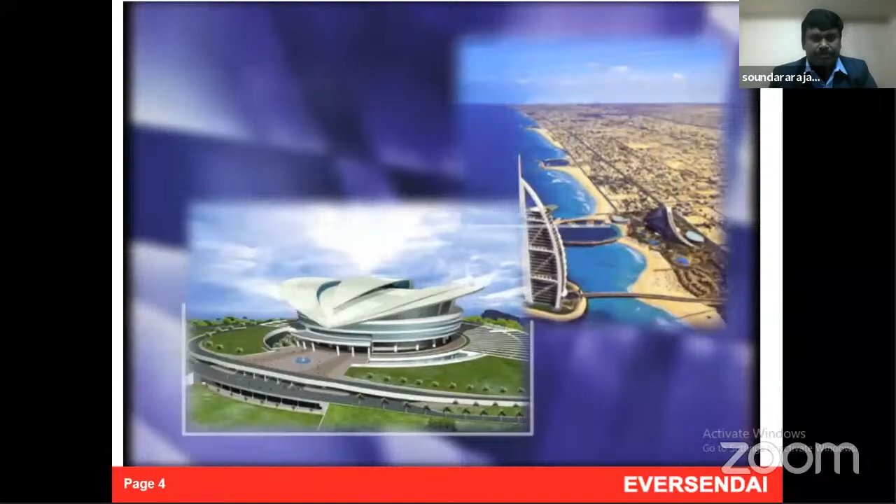Normally we belong to tall towers. That is our core strength. So we undertake integrated structural steel works, composite structures, mechanical installation works, and offshore processing units.

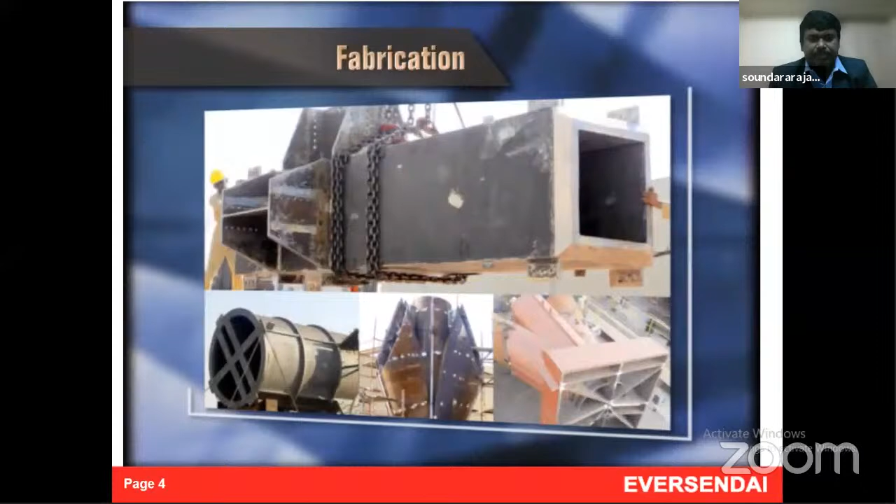So these are some of our fabrication photographs. These are the projects which we have done in Malaysia: Petronas Tower and the Sky Bridge, which is connecting the left and right tower, Putrajaya Convention Center and the KL Tower, Telecom Building. This is KL Airport, KL Central Station, the metro.

These are the power plants which we have done in Malaysia, and we are the first to do a 1000 megawatt power plant.

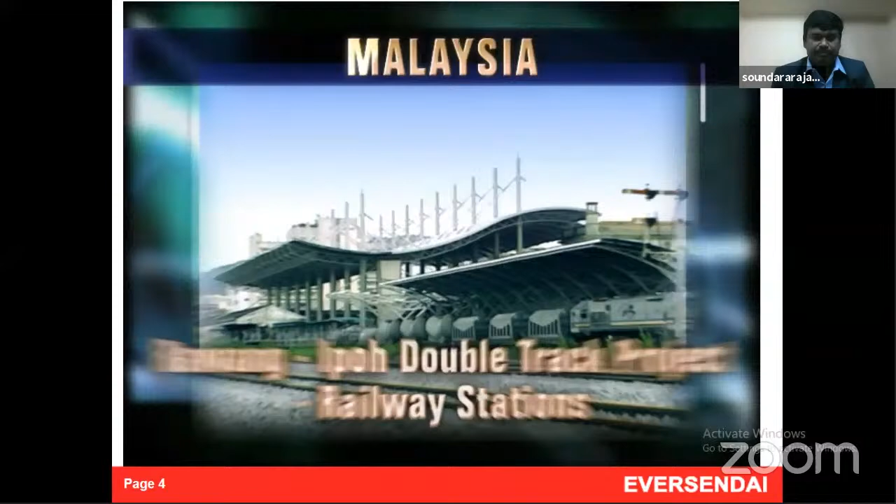And these are the projects in Singapore. The Republic Plaza, currently the tallest Singapore building. Tuas checkpoint, which is connecting Malaysia and Singapore. This is Changi Airport, the current Singapore airport.

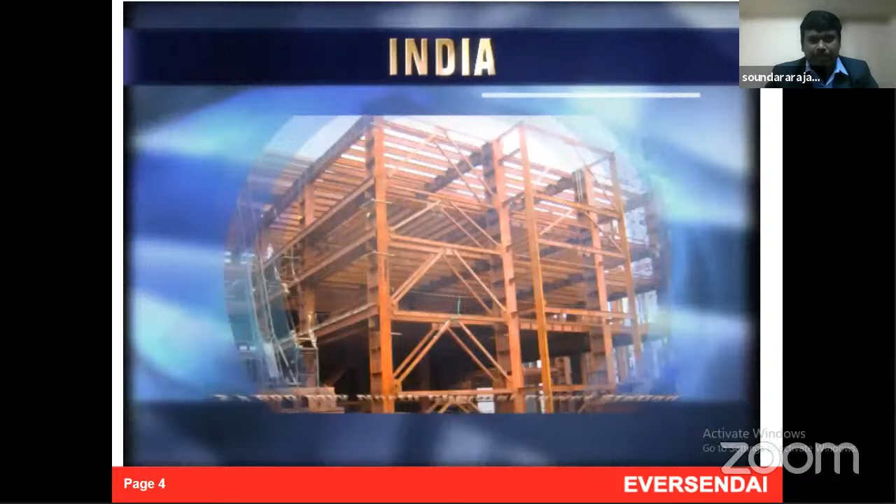Thailand, Philippines, Hong Kong Airport. And these are the projects in India: Mumbai Airport, North Chennai Power Plant, Yamco Power Plant, Marathon Tower in Mumbai, Worli Tower, which is an 85-story building of Oberoi.

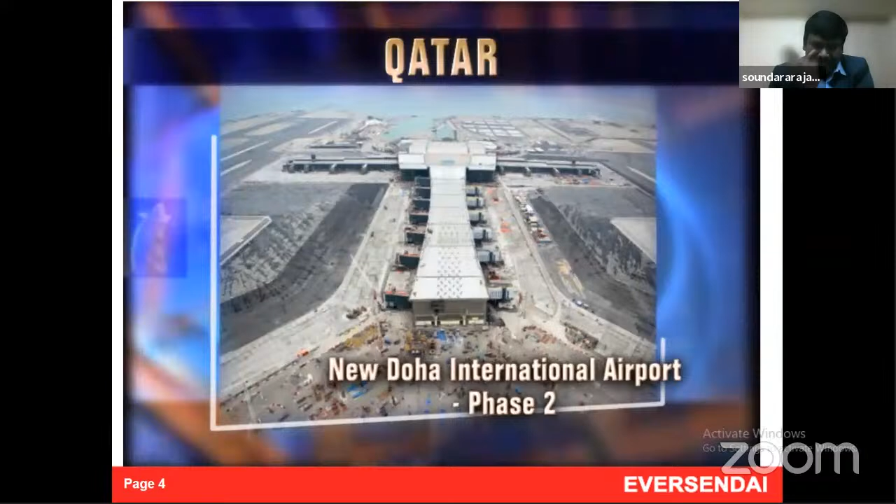This is in Saudi. These are the projects in Qatar. This is the Qatar International Airport, New Doha International Airport. This is another crazy project, the Qatar International Museum.

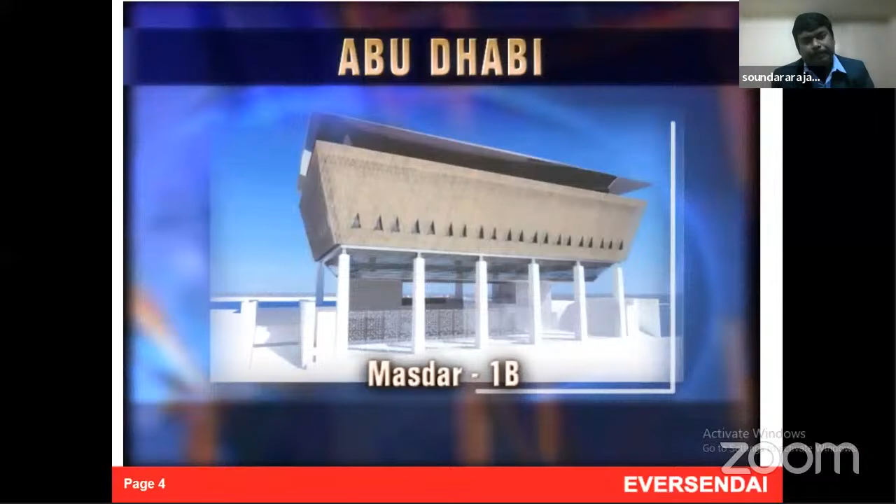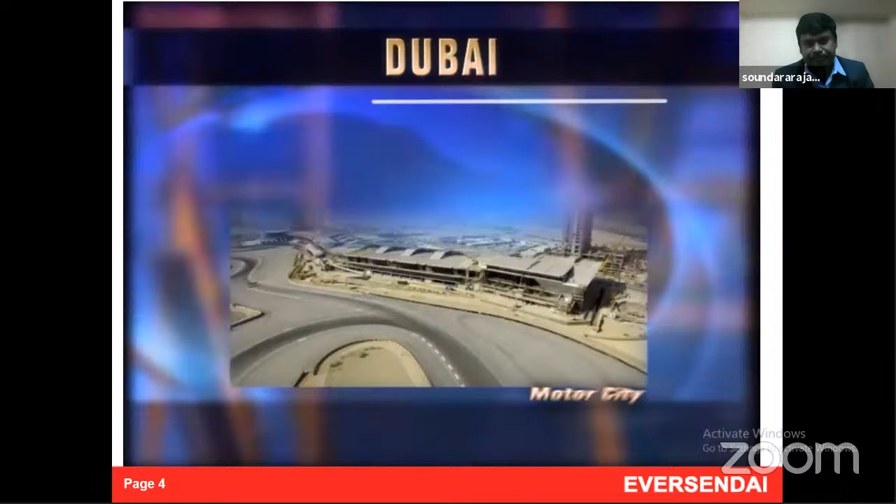So with 35 years of experience, we are currently stepping into the next frontiers. Today what we are going to do is majorly divided into two chapters.

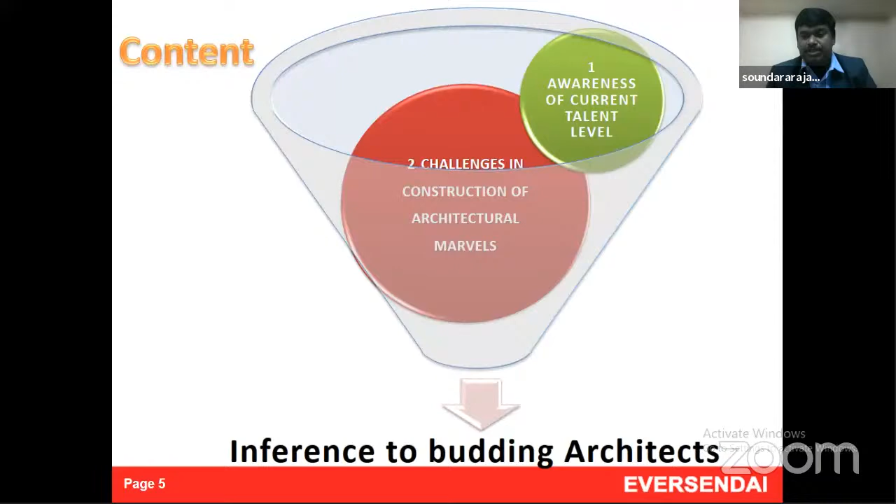Since we are here with the student community, I want to create some awareness of what an architect currently is and what we as students are aware of, and then we will get into the challenges. Normally, what is the role of the architects?

Architects create, improve, and protect the environment in which we live. So this is the major role of an architect. We plan, design, oversee the construction, and take care of the maintenance of the building. Everything we do as infrastructure - houses, towers, dams - everything is part of architecture.

But how far are we doing this? Whether it is 5 years before, or say 125 years before - 125 years, we have the metallic era, we have the Eiffel Tower and the Statue of Liberty. So all these things we have built before 125 years. Is this 125 years the one where we have done the architectural marvels?

No, we go further beyond, we go further to 150 years where there are marble structures which we have created. The world-famous Taj Mahal, which we built 150 years before, as a world marble wonder. We collected marble stone from Rajasthan, Tibet, Afghanistan. Even the dome - if you can see the dome, the main dome is about 55 meters, and the height is about 35 meters.

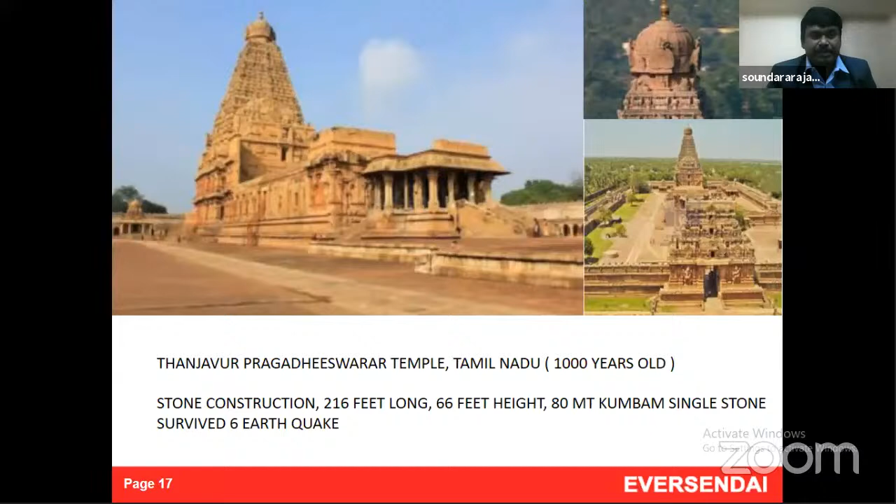The wooden bridge in China is about 1,000 years old and still stands. Further, we go beyond to about 2,000 years when we see the Grand Anicut in Tamil Nadu, which was built about 2,000 years before, and the marvel still stands.

We go further beyond 2,300 years, the Great Wall of China. We would have seen Game of Thrones, where there are huge high walls of 700 feet or 700 meters long. Similarly, before 2,300 years itself, a wall has been built between countries to protect the country from invaders.

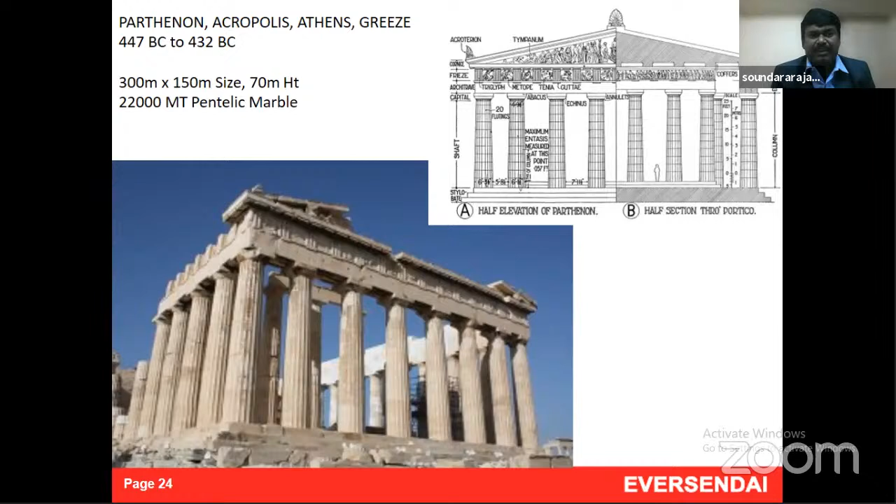2,500 years we passed upon. We can see from Greece marble stone marvels of about a height of 70 meters. They have built these in marble.

Further 4,500 years, we go into pyramids, where every block is 2 meter by 2 meter. It is the best construction, where it withstands all the natural calamities and it is still undisturbed.

5,000 years. We have the Stonehenge in England. All the prehistoric monuments are there. It is a culture of 5,000 plus years. We as engineers, we as architects, have been living and giving wonderful monuments to the world.

Despite all these things, normally your professors or even your parents will talk about those days being the golden days. Even if you graduate and cross another 20, 25 years, you will say no, the era when I lived, or the era of my grandparents, is the best.

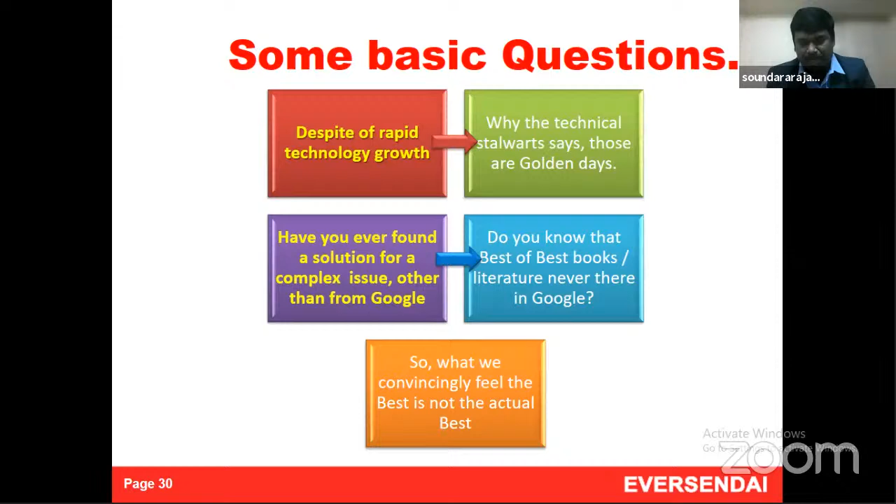Since nowadays we mostly don't put pen to paper and draw on the drawing board, we normally get into Google and some softwares where our productivity and our thinking capability get reduced.

Now we will get into the challenges. The architectural marvel has been created and sketched out. What are the difficulties in bringing this marvel into a practical aspect? I divide this into 3 phases: one is detailed design challenges — as an engineer we have to do detailed design where there are challenges; the next is fabrication, where there are difficulties; and then there are difficulties in erection.

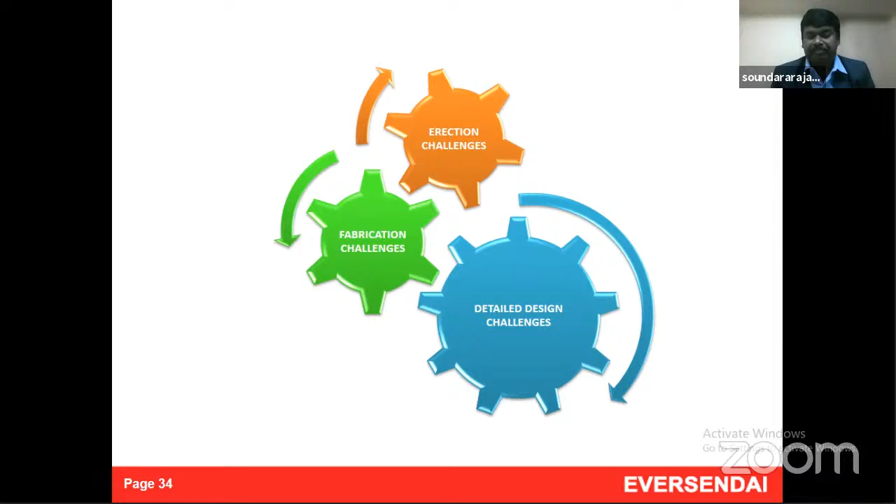First we will see the detailed engineering difficulties. So if you can see the difference between the skeleton and the finished structure.

First is the geometry and setting out. Normally, when we set out the geometry, it is never orthogonal. Whenever we want to build some marvels, it will never be orthogonal. Take anything — even when Ram Kumar talks about the first structure, he mentions the Statue of Unity. There is no symmetry at all — the nose is different, the ear is different, his dhoti is different, everything is different.

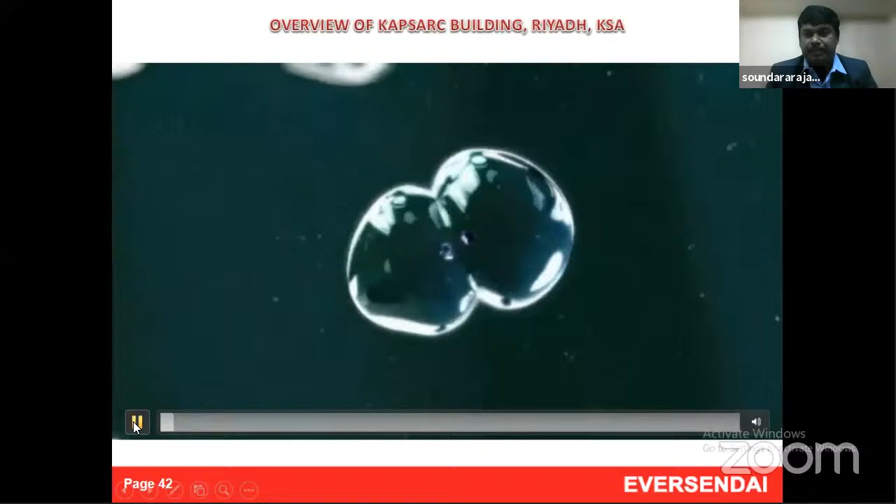Now we come into the geometry. We will take an example of KAPSARC — it is in Saudi Arabia, a mosque, and this is the architectural intent. I will run through a small video of how the architect developed the structure, by means of droplets of rain put together. This is basically a mosque.

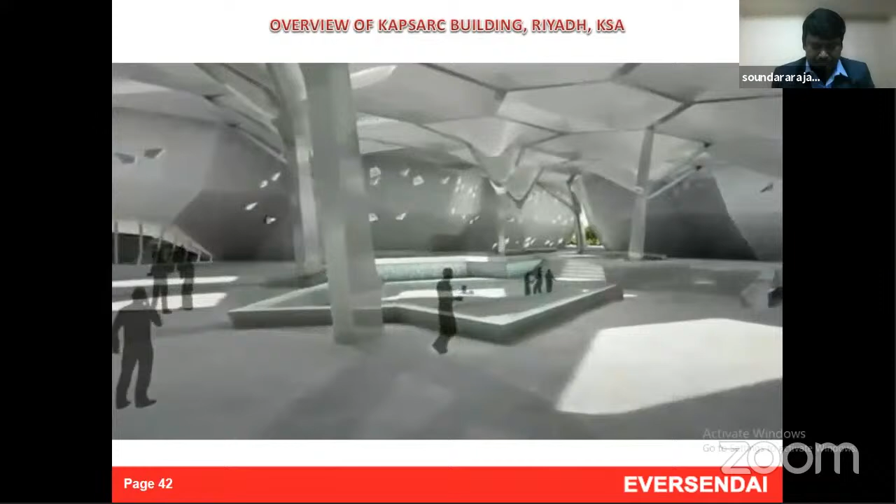It has different types of columns and nothing is symmetrical. It has natural light coming in.

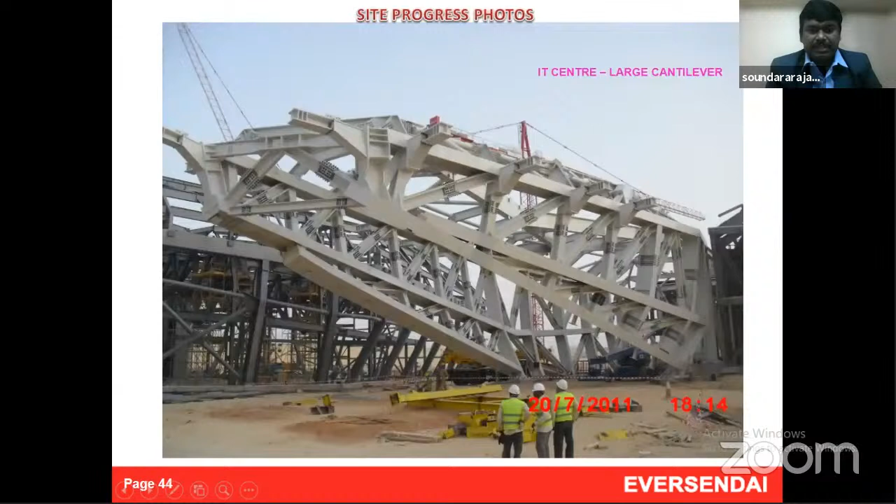This is the stage during construction where you can see the skeleton. This is a cantilever — about 15 meters cantilever. So the geometry plays a big, different role.

The geometry has to be derived from the major architectural model — that is where building information modeling comes into picture. There should not be any differences between the architect's thought and the real-time construction. And the nodes — normally this is what I want to emphasize.

There should be a vision about when we blow up some joints — during construction there can be a bolted joint or a welded joint. So what type of joint is required, which member has to go first, whether structurally the intent has been perfect or not — these multi-planar joints play a very big role, along with the connecting of these multi-planar joints.

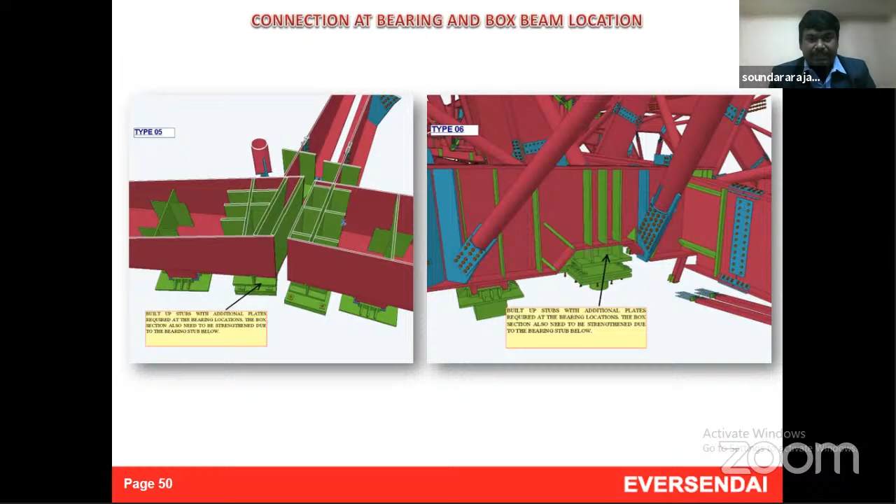This particular structure is supported by means of bearings, and the bearing supports are highly critical. These are some connections where the members are different — you can see the supported I-section member is of a different size to the connecting supported member. So the connection is highly complex.

I will just put an example of another dome structure.

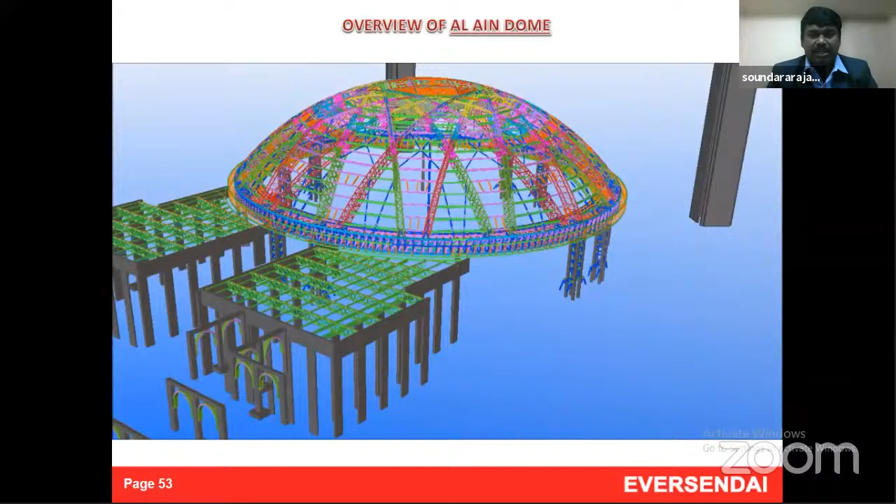The difficulty in constructing a dome is that normally a structure is intended to deflect. There is a difference between the deflection during construction and deflection during the purpose of use. When the structure is being deflected during construction, I have to give a pre-camber. Pre-camber is nothing but inverting my deflection.

Say, for example, my structure is deflecting by about 50 mm. From my theoretical point, it is deflecting 50 mm. So during the construction process, we will construct it with an upper camber of 50 mm, so that once it deflects, it will come to the normal position. That is called pre-cambering.

So when we do pre-cambering, the problem is, in a dome-like structure, the dome will have proper diameter and proper surface dimensions. But this pre-cambering is done only on the trusses, running on the peripheries and at the centers. These trusses alone will be lifted up, so the pre-cambered structure will be highly complex to arrive at.

So this is a similar structure where there are supports and the pre-cambering has been effected. At every node, the pre-camber will be defined, and only then will the geometry be arrived at. This geometry and the original geometry will have a difference.

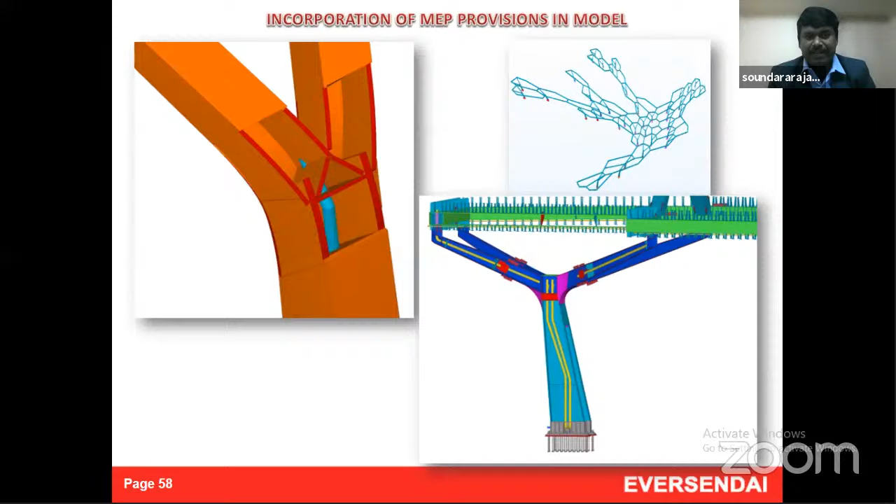The next challenge is the other vendors. Apart from the structures, we have MEP pipelines running through, and rainwater pipelines. All these things have to be coordinated. So there is a small video of how the MEP provisions have been incorporated. This is a 3D model. During the 3D modeling phase itself, all these plates and pipes will be modeled, and the required openings will be provided.

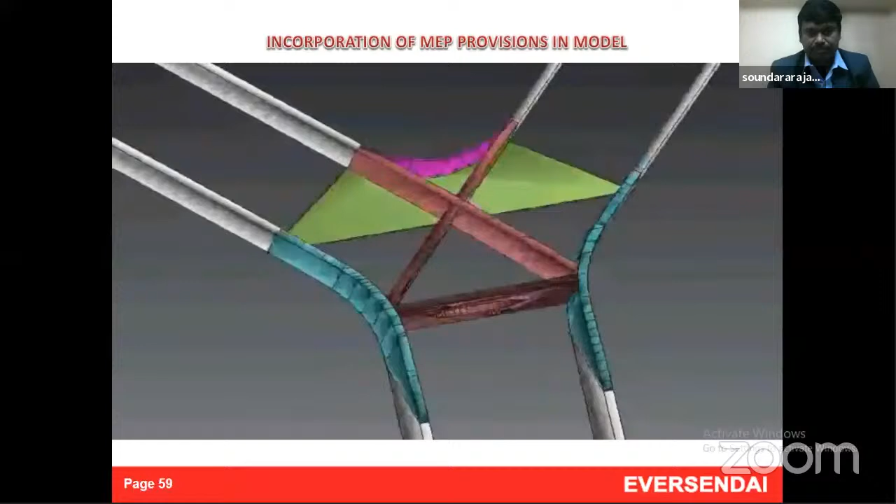So unless we do building information modeling, we cannot do it properly.

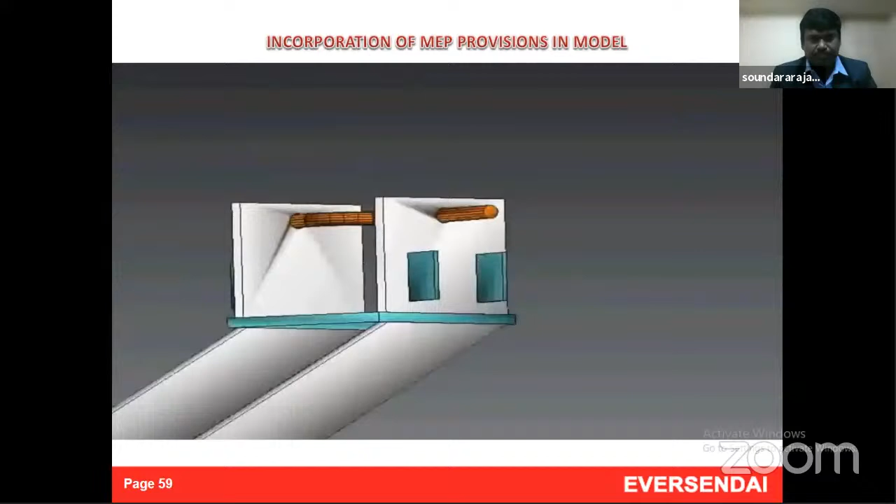So other disciplines like inserting plates inside the core walls - you can see these are shear walls. Normally, a shear wall is a structural element provided in multi-story buildings, especially to control the drift. Normally the structure will deflect H over 500 or H over 400. That means if a structure is about 50 meters, so 50,000 divided by 500, the structure can deflect up to about 100 mm. So this deflection control mechanism is done by providing shear walls in between the structure.

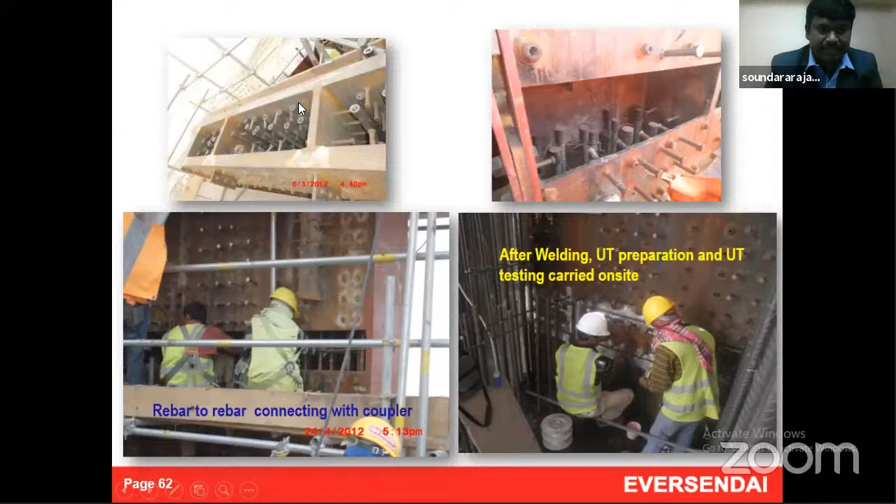So these things also have to be coordinated. You can see the shear walls and the rebars - highly congested. All this has to be coordinated during the design phase itself. And also the facade.

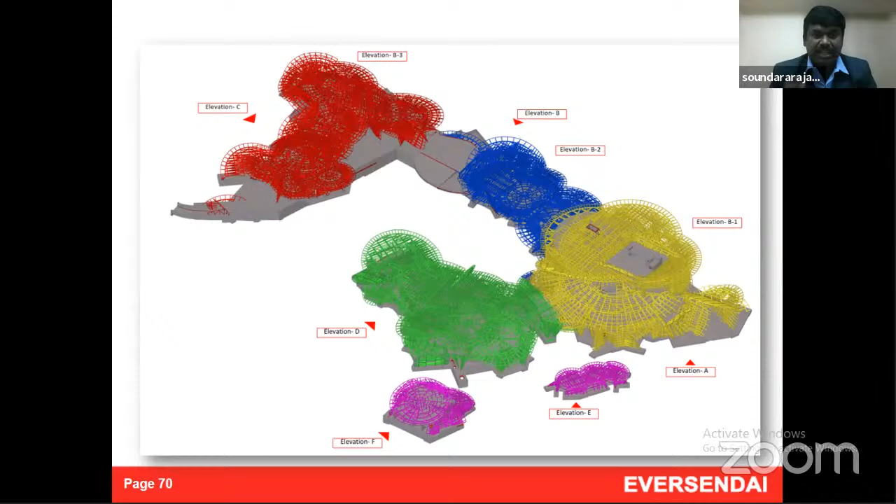And during the fabrication time, as we see in the design phase, there are multi-member nodes. This is another crazy structure which we love. This is one project where it had been awarded to another contractor who could not build it, and even the Qatar Queen herself was the project manager overlooking all this construction. This is the Qatar National Museum, and it is a very crazy structure.

The architectural intent for this particular structure comes from the desert rose. If you see in the desert, this is the type of rose which will be available.

Based on that, that particular structure has been arrived at, and it is one of the highly complex structures which in my lifetime I have seen.

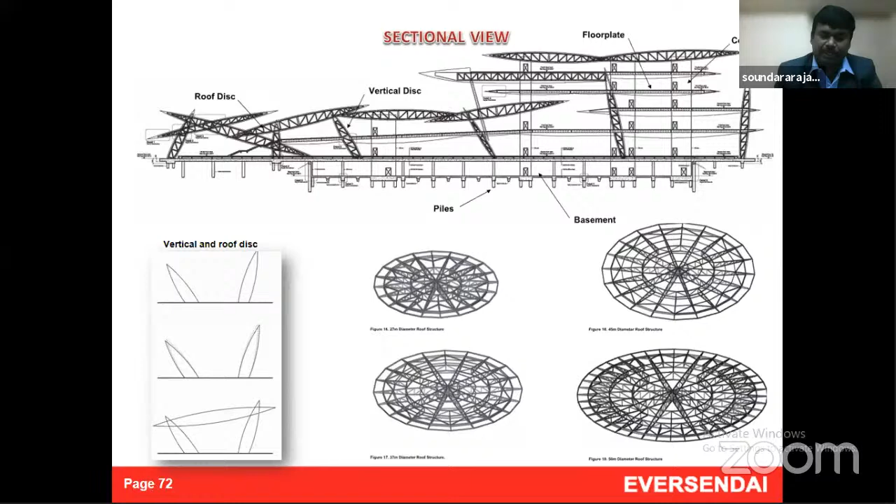You can see the concept. There are vertical discs, you can take the left bottom, and over the vertical disc there will be a top roof disc connected. And this will be of every inclination. This is from real-time desert rose, it has been arrived at. And these are the joints.

At one particular node, about 64 joints were there. 64 members have been connected in one particular node. So you can see the highly complex multiplanar nodes.

And the next challenge in term is achieving the curvilinear geometry. When you take any curvilinear structure, some structure we can curve by means of roundo machines and we can round it off. But sometimes the multi-dimensional, multi-angular members we have to do in segments. You can see at the top where small segments have been welded together. And this is that particular portion of Abu Dhabi roof.

And this is another crazy structure, this is the YAS canopy, where this is again a challenge in terms of bending and curving the members. And it is again a hollow structure.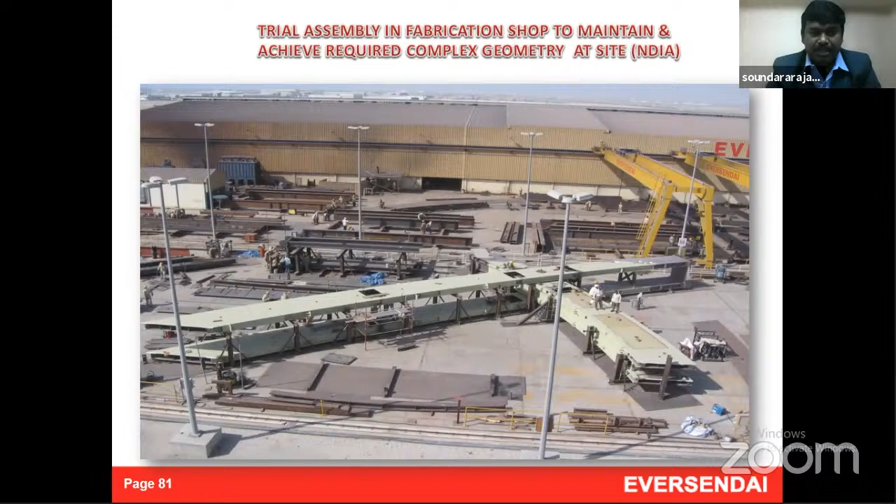This is for Qatar airport. So this is again for Qatar airport. You can see this is the curved roof, the main terminal roof structure. And this again for the Qatar National Museum. This is in the factory itself. Everything will be verified, the fittings, everything will be verified.

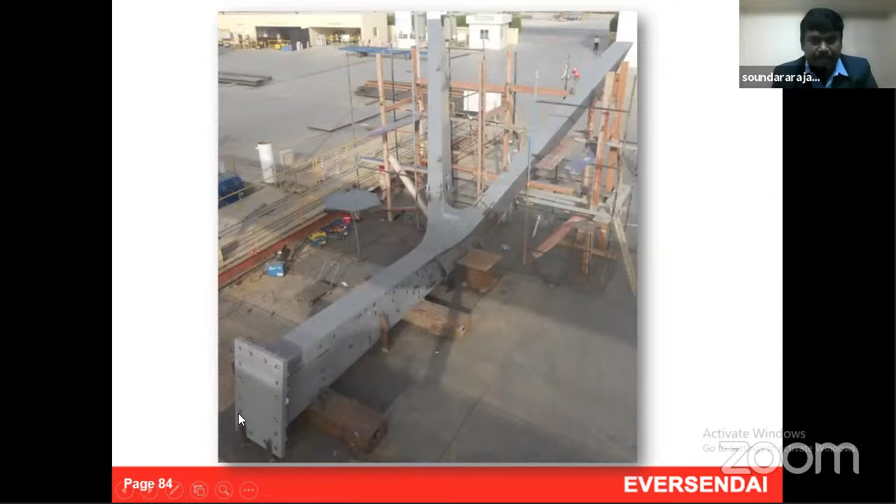This is in India, where we have made the complete structure, whether it is the pre-assembled and the verification of all the joints have been made. This is the column structure, whatever you have seen previously, we have inserted the rainwater pipes, everything. So the pre-assembly has been made at the site. Before the pre-assembly, the structure has been made, the pipes have been inserted, and even for the electrical works, the conduits have been made.

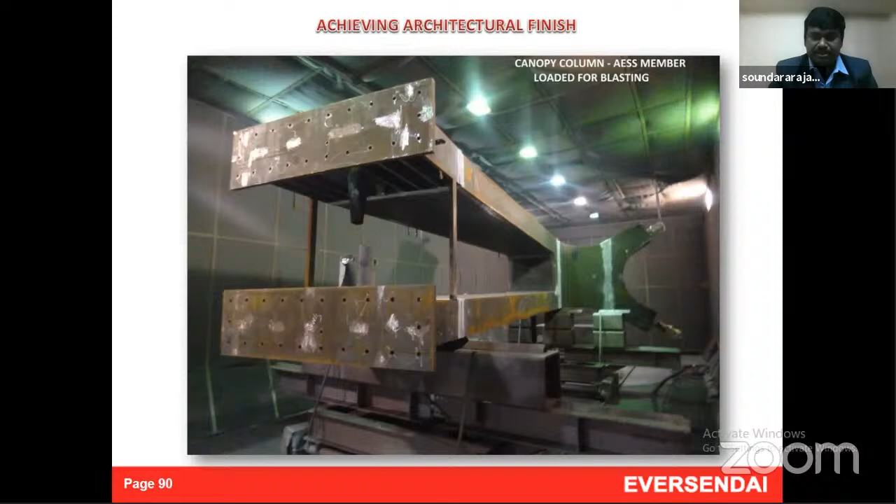And these are the facade cleats which have been made during the fabrication itself. Whenever there is an architecturally exposed structure, that means it is not going to be cladded, then a special type of preparation has to be made for the structural steel. First, blasting has to be done. Blasting, it is of SA 2.5. SA 2.5 is a Swedish code which talks about the surface roughness and surface finish category, and the filler application will be made. Then application of the primer paint, then intermediate mid-coat paint, then the finished coat will be made, and the structure will be shipped.

Now we have seen all the challenges during the design phase, where we sit in an air-conditioned room, where we can think to our own extent. And in the fabrication facility, yes, it is under a roof where we have enough time to do it. But in the erection phase, where it is tall structures, we will be working at a height of say 800 meters, 1 kilometer height, and it is a curved cantilever of 50 meters. So we cannot think. That means the erection engineering, before the erection itself, there has to be a proper engineering made.

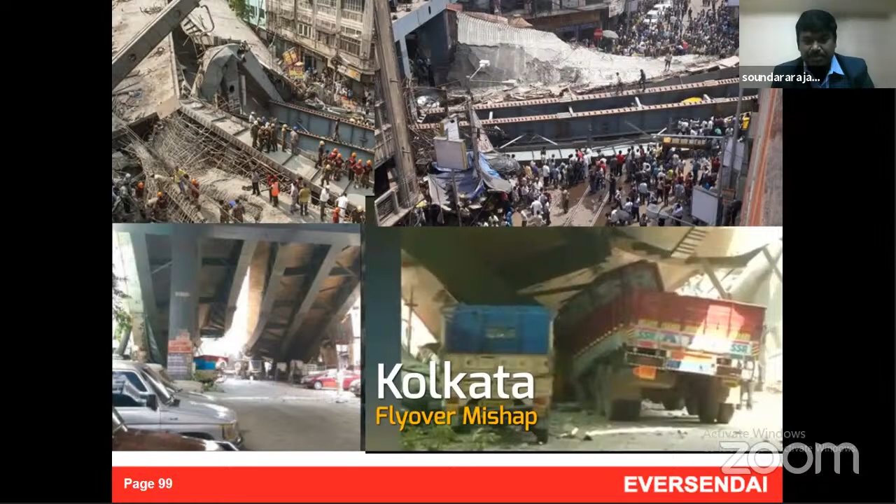So what all these things emphasize is that during the construction phase, we engineers have to make a thorough study before going into the construction itself. So I will just briefly explain to the architect field, since it is not your cup of tea, but you have to understand the basics. For example, on the left side, you can see a portal frame. That means it's a stable structure.

At point A it is fixed, and point D it is fixed, with a column between A to B, D to C, and B to C we have a beam. So the present structure, if complete, is completely stable and there are no issues.

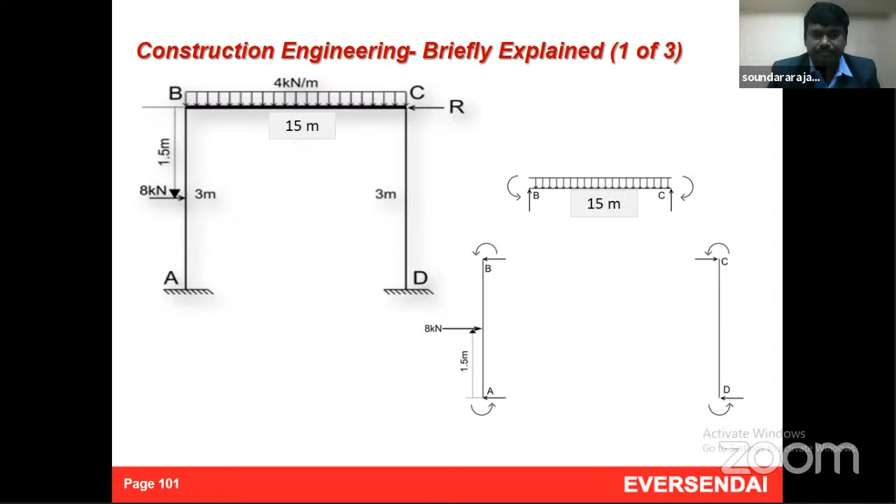But during the construction phase, how does it happen? The beam, say of 15 meters, will be cut into two during transportation, meaning there will be a splice at the middle or center. During lifting, it will be lifted at a single point or at two points. That means in the middle diagram, the support is at the ends, but when you lift it at the top, it is not designed or intended for that particular purpose.

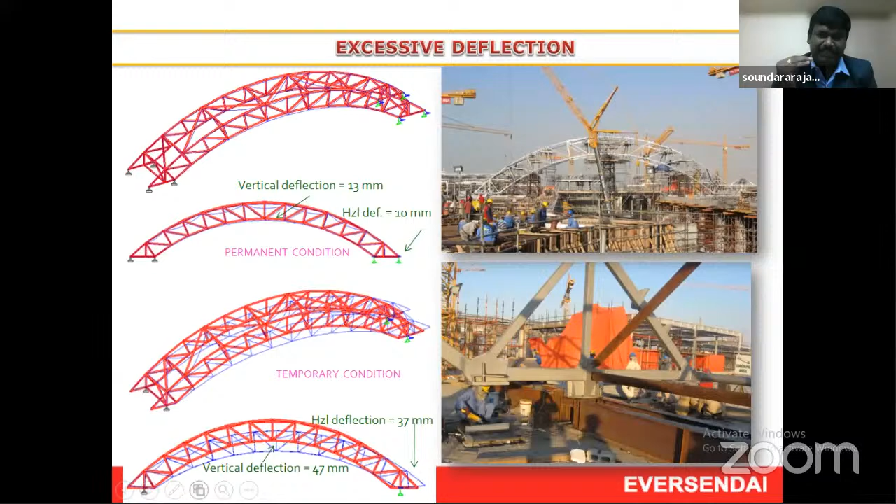If you don't understand this, we will elaborate in subsequent slides. This is the pre-camber which I explained during the detailed design phase. At the top, this is the original architectural intent, and during the permanent condition there is a deflection - the structure comes down about 13mm, or say 50mm. What we do is an upper camber, so that once it deflects, it comes back to the original position.

We will get into some buildings. I'll take you through 4 buildings and how they have been engineered, and what the challenges were in engineering while constructing. The first one is the Gate District Tower.

The structure, as I explained two slides before, now think of it as a column. It is designed such that if the top hat portion is there, it is stable. If the top portion is not there, it will behave like a cantilever, a free cantilever. So until the top hat is completed, it is a cantilever.

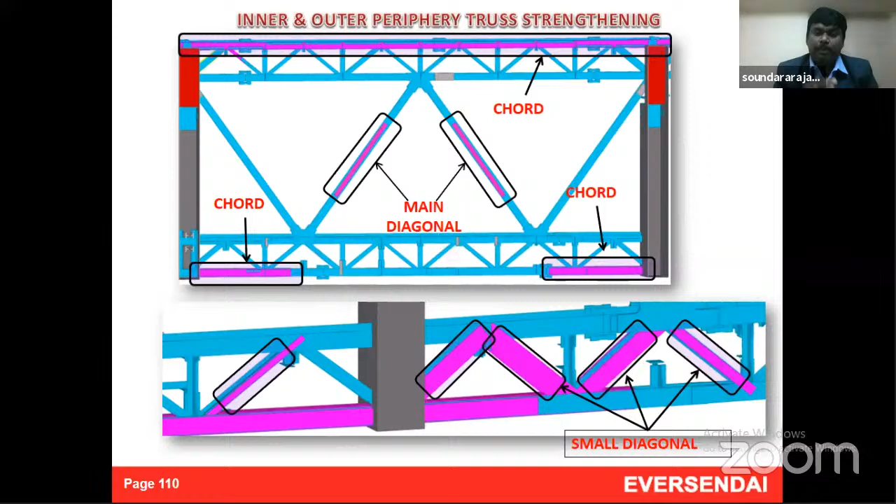During construction, those deflections have to be controlled, and this tower has to be lifted from the bottom. Based on analysis, some members have to be strengthened. Different types of analysis are made for how it behaves during complete cantilever conditions and during lifting. Based on that, the previously designed structure has to be strengthened wherever required. This is the conceptual arrangement.

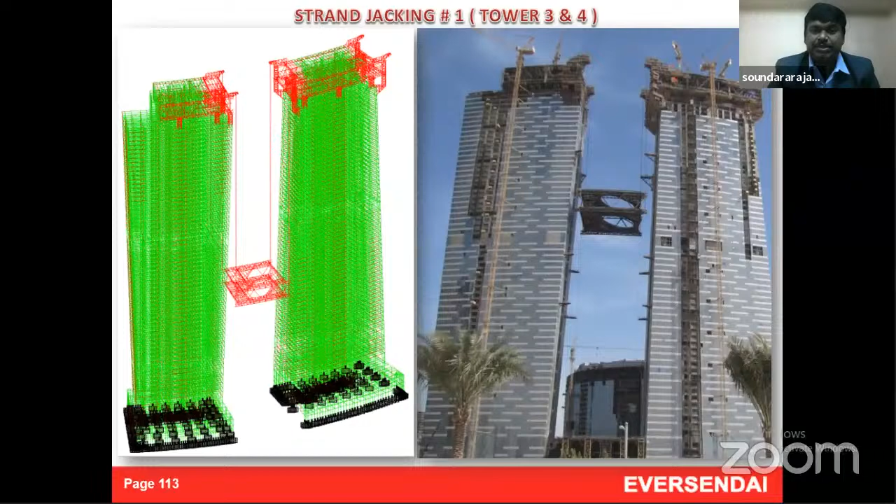The structure design during the construction phase is different from the structure during the permanent stage. So erection engineering plays a very important role, and the concept of how we erect has to be thought through even during the architectural intent design phase itself.

The last cantilever at the right end is lifted in 2 pieces: one is 150 tons and another is 300 tons. This is the completed tower - all the lifts have been carried out. This is the structure once it is lifted.

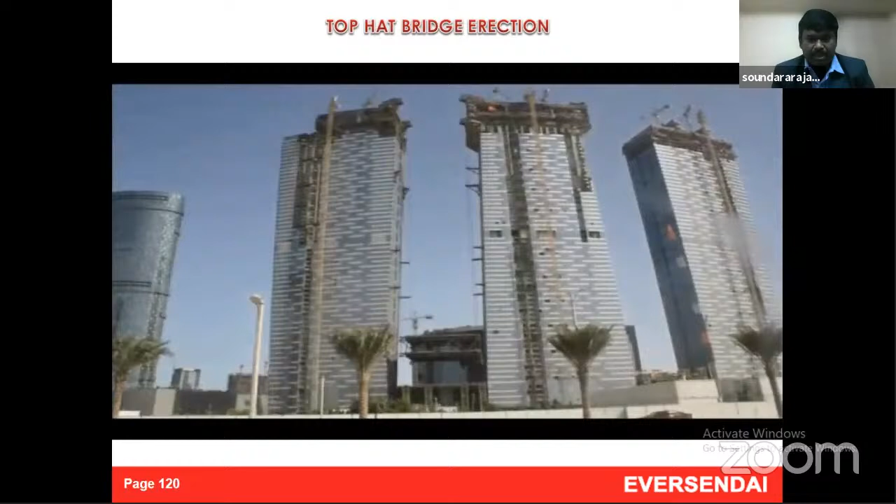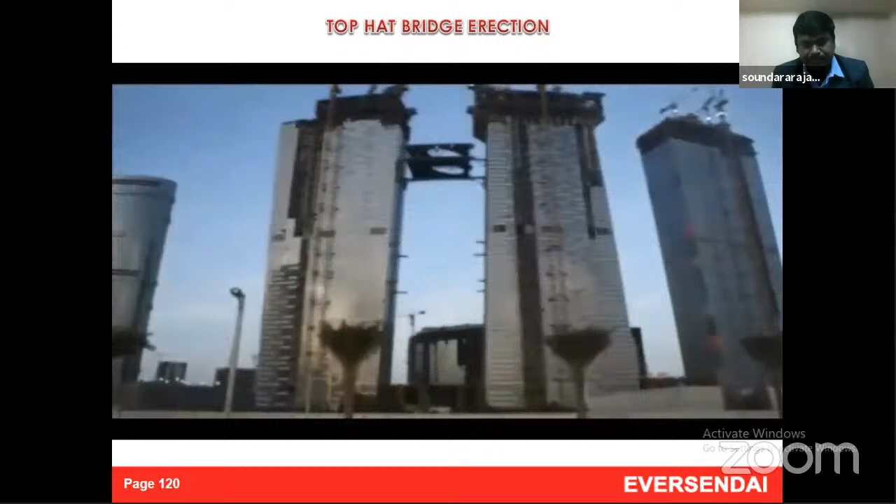I'll just play a small video. You can see how much wind is acting - you can see the trees that have been planted, and from day it has now shifted to evening. A lot of wind and climatic change can be seen. The next day, the next tower lifting has been happening.

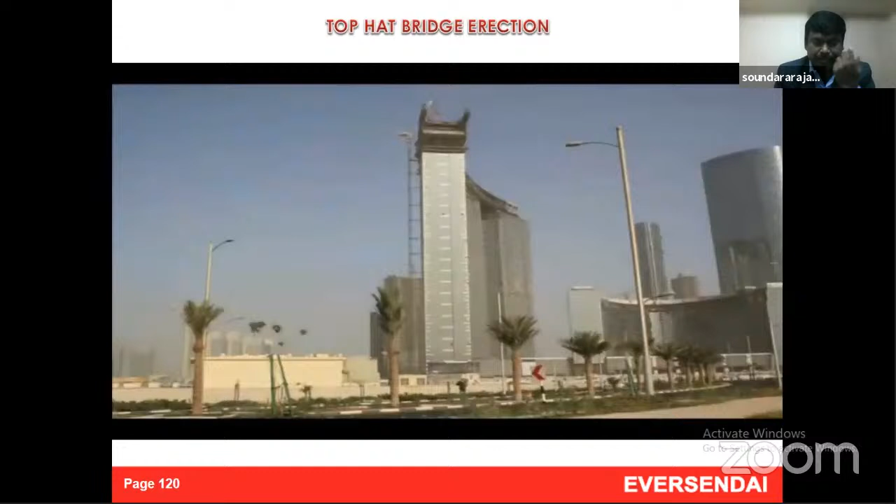So we have to design for all these winds. You can see the last cantilever has been lifted.

So this is the Gate District Tower.

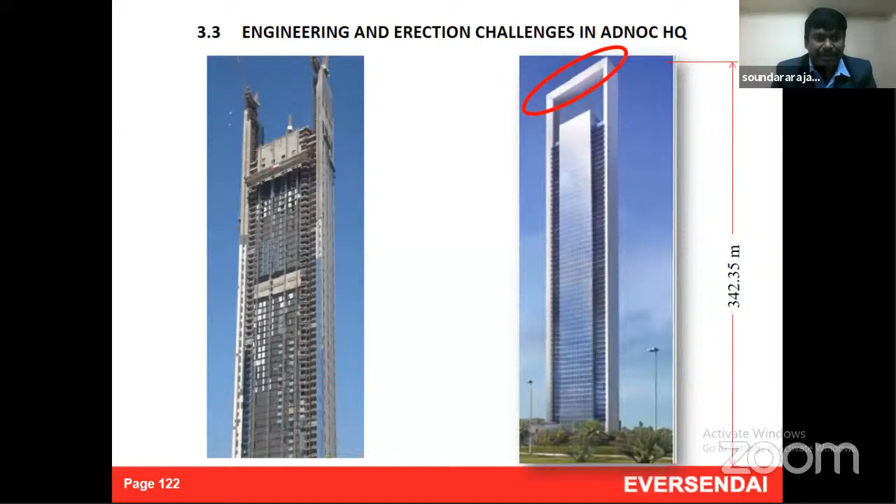We will take another interesting one, ADNOC headquarters, where the structure has a top open area with very few gaps between the tower and the top roof structures. For this structure at Eversendai, the main structure has been completed, but there was no thought process on how to build the top structure. It's built on a highly trafficked road with literally no space to pre-assemble and erect, so the structure has to go up at the top.

It is about 2,100 square meters, 67-meter length and 32-meter width, and the total structure is about 1,400 tons that has to go up. It basically consists of 3 trusses.

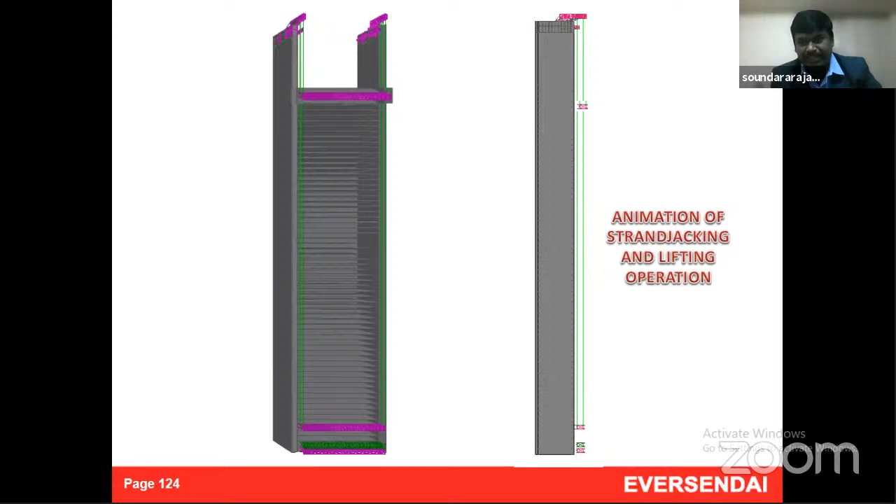So the concept we arrived at is shown with the 3 trusses at the bottom right. The 3 trusses have been assembled one over the other, and it will be lifted. Once lifted, it is not getting into the structure directly - it is lifted and kept away from the structure. Then we have to take it into the structure and insert another piece.

If this piece remains in the original condition, the lifting will be a problem, so it has to come out. Then it will be removed from the vertical jacking and the horizontal jacking will happen, and then it will be put into position.

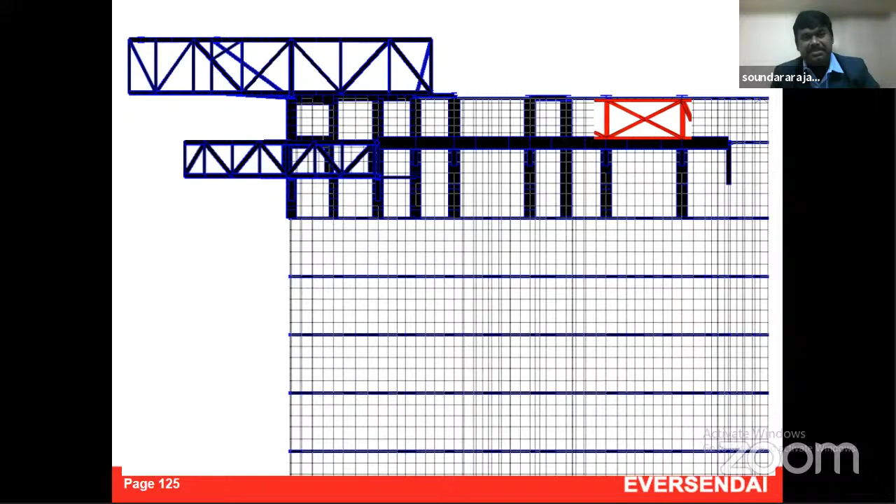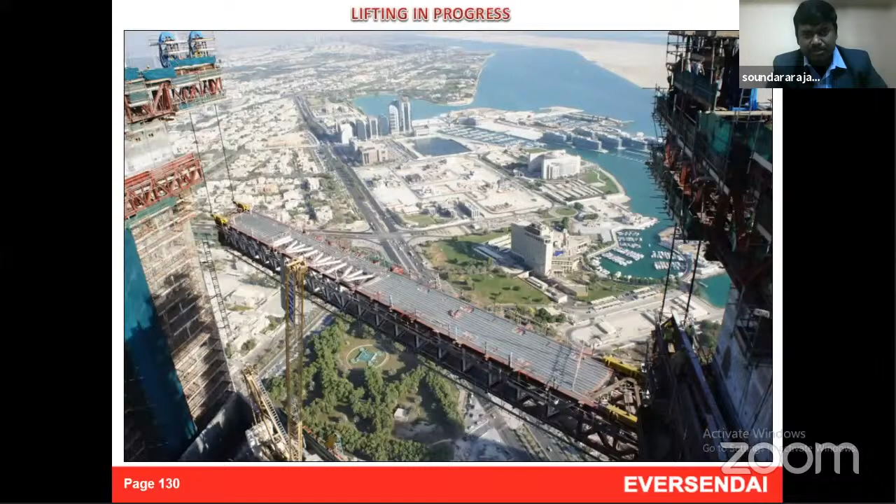Now you can see at the bottom there is no truss to receive this one, so the bottom sliding truss needs to go below that. About 5 meters it slides outside - the top portion slides 4 meters, and the bottom portion slides about 5 meters.

Now it's getting ready for the horizontal jacking, so it is slid and kept into position at about 32 meters. Similarly, the second and third sets of trusses come in, then the infill beams will be erected.

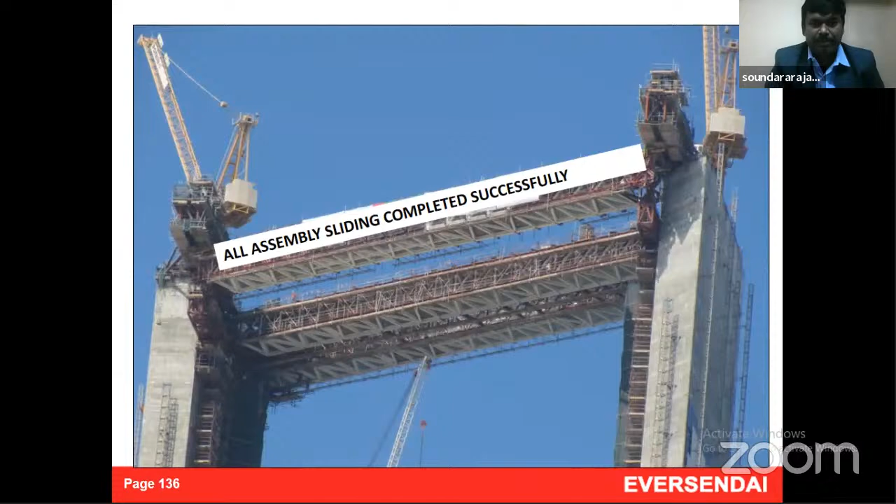So just to play a small real-time video of this - you can see the first set of trusses has been lifted.

Every time a survey will be made to check whether the structure is behaving properly, whether the deflection is proper, whether the hindrances we have cleared are safe, whether the structure is deflecting at any locations, and whether the joints are making any sound.

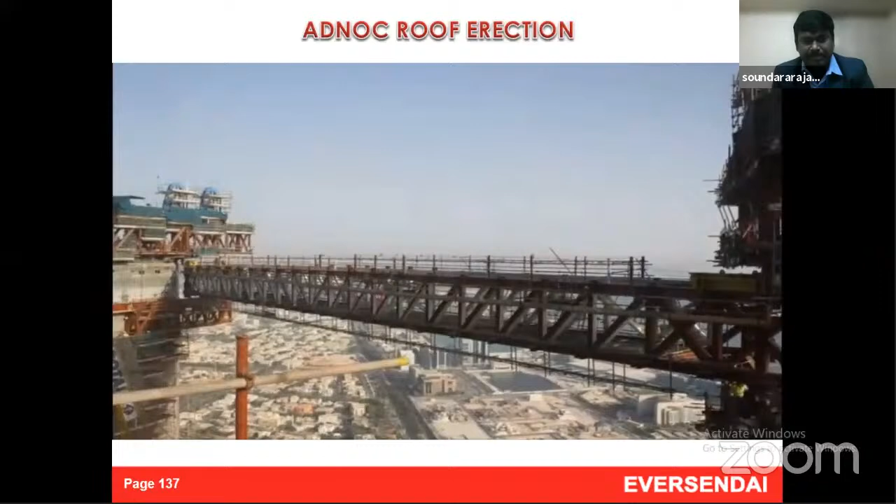This is the horizontal jacking. The sliding truss has been put about 5 meters - it has slid horizontally to receive the piece. Now it is detached from the vertical lifting, and the horizontal lifting is in process.

Every time, application of grease and lubricants, whatever is required, will be applied to reduce friction. Once this is done, similarly the other two will be completed.

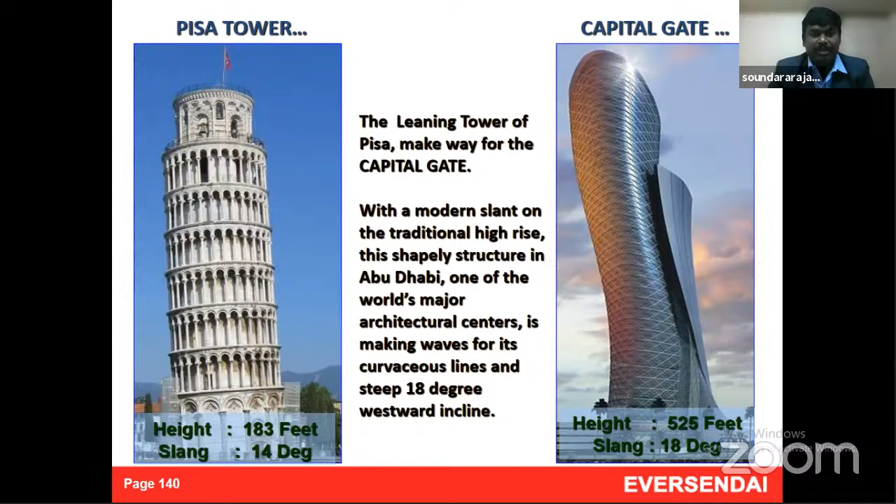It is completely a diagrid structure. In India there are few diagrid structures, but not of full swing - this is the beauty of a diagrid structure where there are two types of diagonal structures: internal diagrids and external diagrids. I'll explain that.

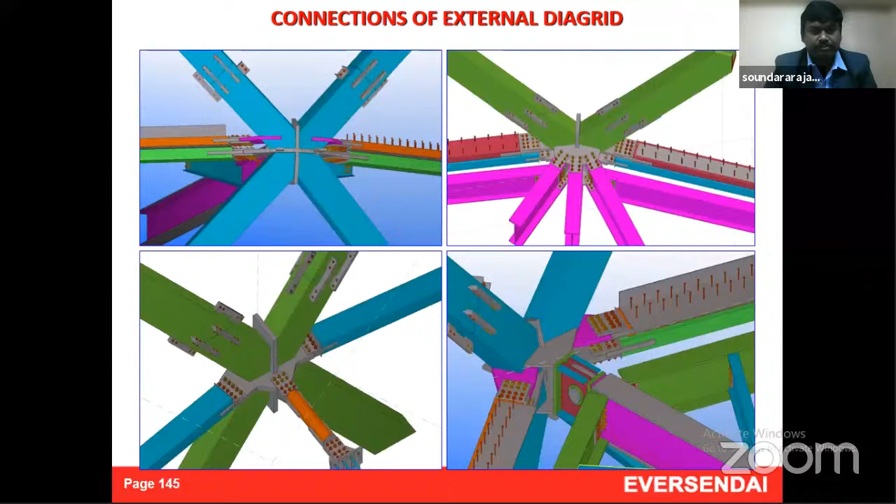So these are the external diagrids which form the shell - there are no columns in this structure, instead there is a diagrid. It forms the facade supporting structure and is architecturally exposed. You can see the external diagrid, and these are the complex joints. This is the lifting of a diagrid piece.

These are internal diagrids where inside, instead of a core, we have an internal steel structure. This is the construction of this internal core.

There is external periphery also diagridded and internal core wall is also diagridded. The external diagrid is SHS, that is square hollow section, and this is CHS, that is circular hollow section. So you can see the planar view during construction time.

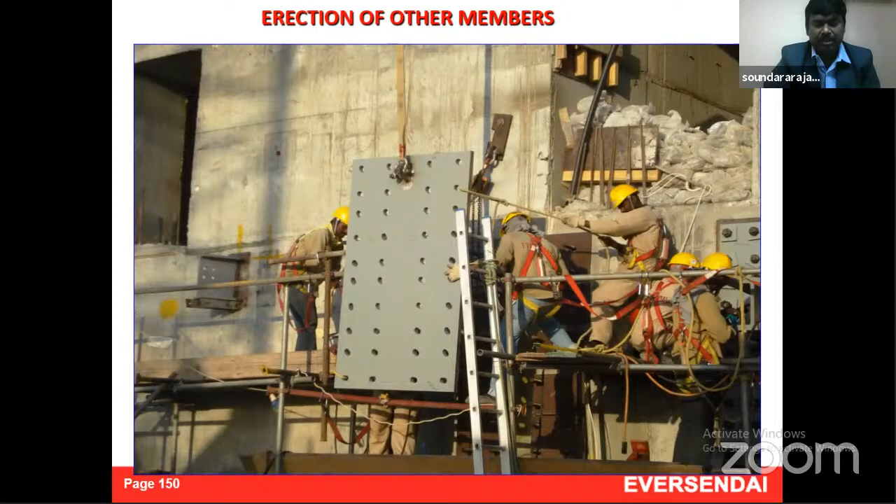Now these are the embed plates which are fixed to the core wall to connect these particular trusses. So this is the construction time. This is a real-time construction photograph.

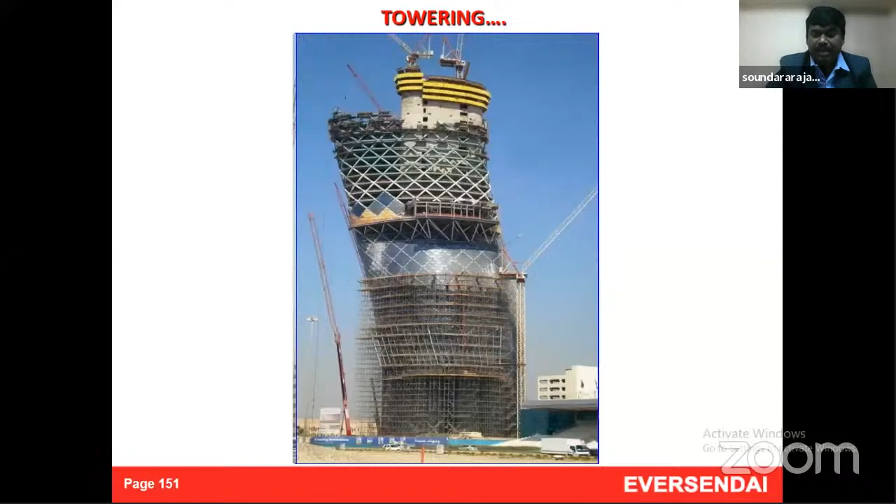In this particular structure, the core wall is straight. Only the structure, the facade and the diagrams have been made in the inclined way. You can see the core wall is straight. But similar to the pre-camber, here also the core wall has been built in a negative camber, negative positioning of about 500 mm. It has been constructed, and then during the construction it has been straightened. In the middle portion, you can see there is a swimming pool. This also acts as a counteracting force for the inclination.

The previous projects we have seen are of overseas. Okay, fine, so there are many in India. So I will take one in India to explain about.

This is in Kolkata, which is Atmosphere, owned by Forum. This is a 32-story building, and it is owned by 32 plus 32, 64 owners. The top tower is a private one, not public. It houses all facilities, its own swimming pool, golf clubs, spas, hotels - everything is there, and it is a private one, not open for public. It is for the tenants who are staying there. There are about 64 tenants in the total structure.

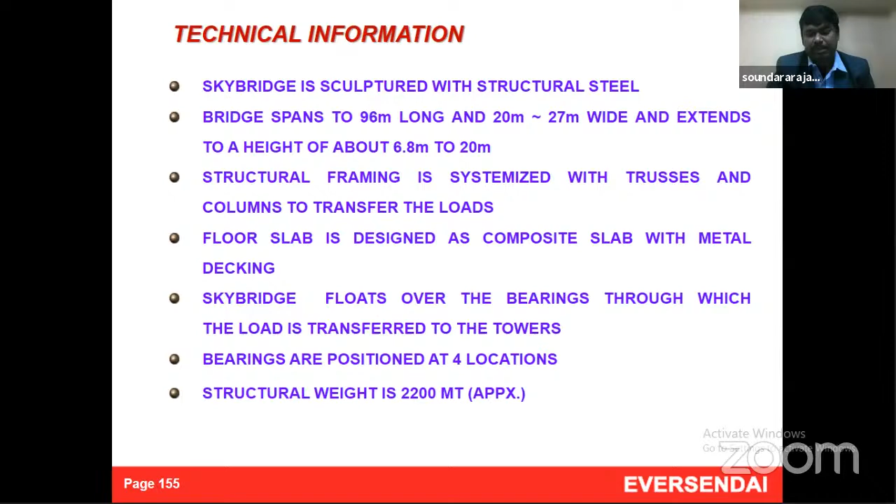So you have seen the Gate District Tower, how it has been lifted. Similarly, it has been divided into three segments - end segment in Tower 2, end segment in Tower 1, and the middle segment. The total structure is sitting over 4 bearings.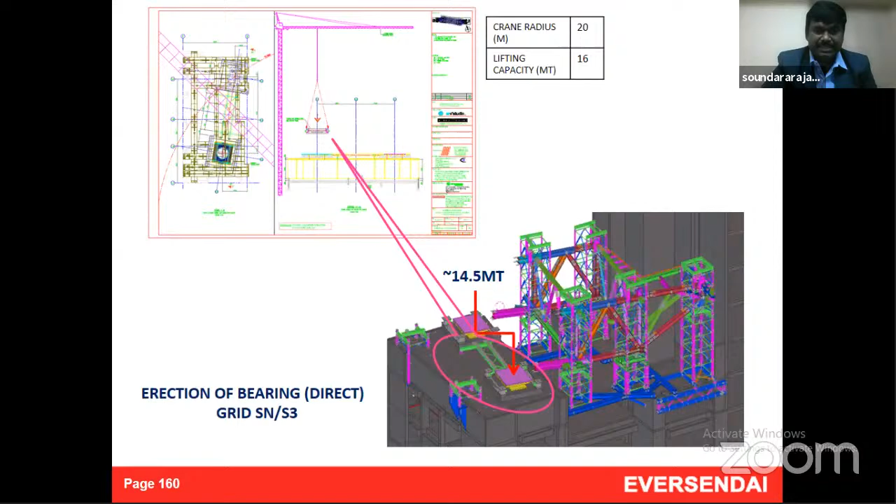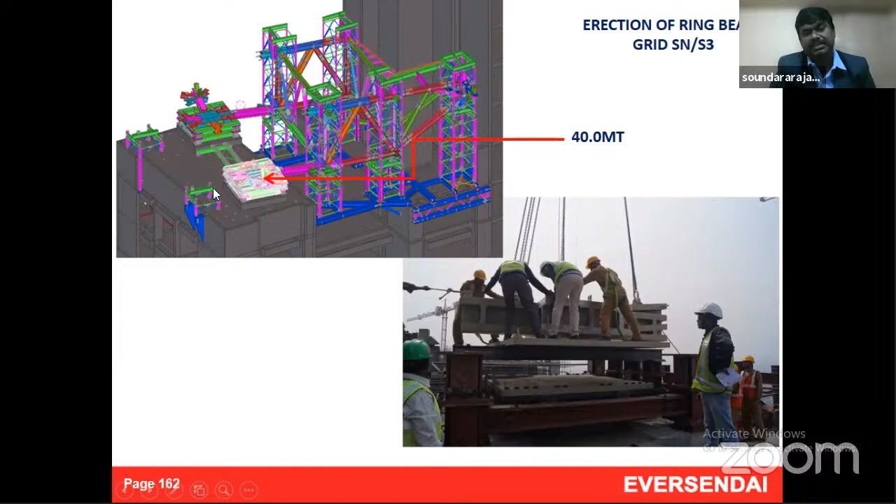To support the bearing, there is a bearing support structure which is about 210 tons to support the bearings. The bearing itself is about 15 tons. You can see the lifting of the bearing - this is the bearing. Similar to this, about 4 bearings are going to get erected. You can see there are 2 bearings on one tower, and similarly on the other tower there will be 2 bearings.

The end portion in each tower has been erected by means of temporary towers, since without temporary towers it is not self-stable. So with temporary towers this has been erected. On the top you can see the orange color member - it is called cat head. Cat head means it is a structure which will support the strand jack. By means of this particular structure only, we are going to lift the middle segment.

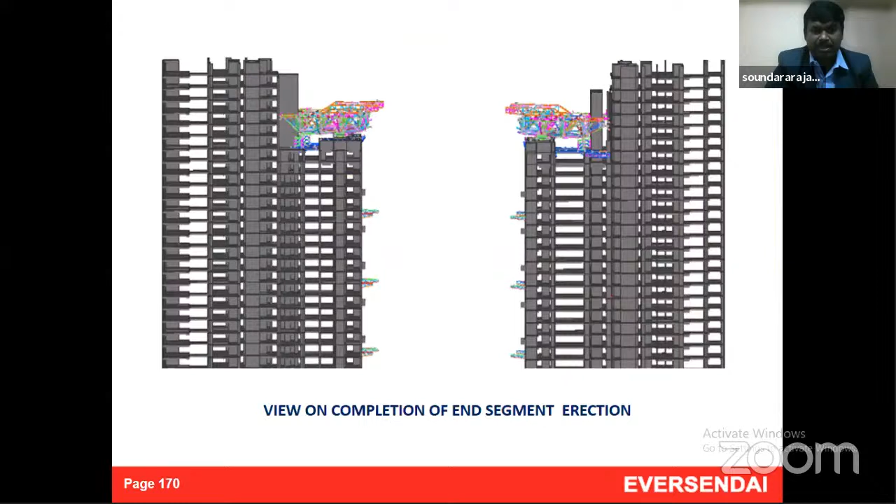So this is the right portion, and similarly the left portion has also been made. Now the jacks have been fitted at the top. So now we have to see what is happening at the bottom - we will be assembling the middle portion. The middle portion again needs a temporary tower, it cannot be done at the slab itself. These are the temporary towers over which the middle structure is going to get erected.

Each and every piece - normally in erection engineering we go into the minute details. So what is the piece? For example, this particular assembly we are discussing currently is of 3 tons, and it is going to be lifted by means of one particular tower crane. There are about 3 tower cranes. This particular tower crane is going to lift this particular piece at a radius of 35 meters.

At this position, the tower crane capacity is about 9 tons, and we are going to lift 3 tons. So for each and every assembly, a crane study and a stability study will be made.

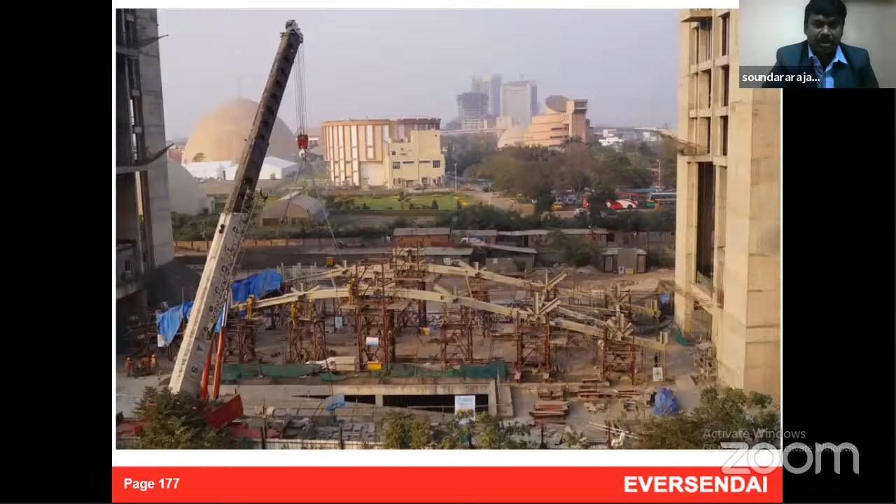This is the bottom chord of this particular structure, and the top chord is now erected, and the arch segment getting erected, so totally the middle structure is erected now. It is hooked, and the lifting has commenced and is in process.

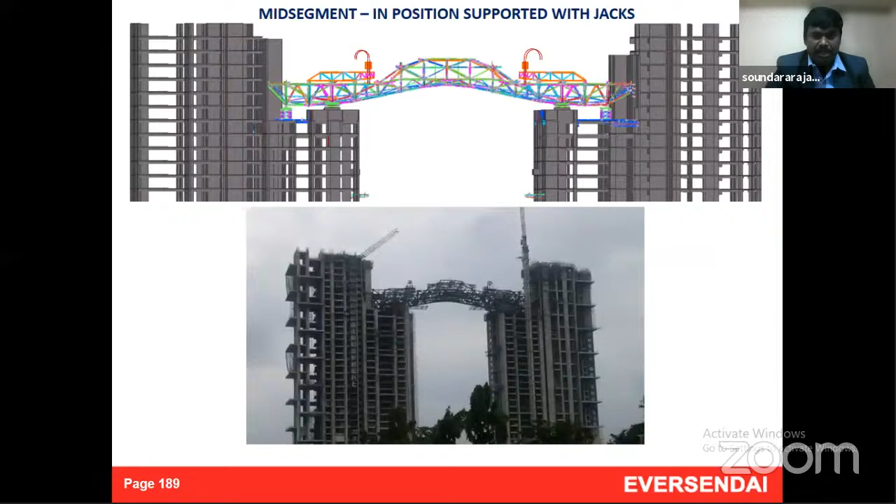So the lifting is on process, and the lifting has been made. Once the skeleton has been made, then the finishing and the other equipment over the structure, the claddings, everything will come into picture. I'll just run a small video of this particular lift.

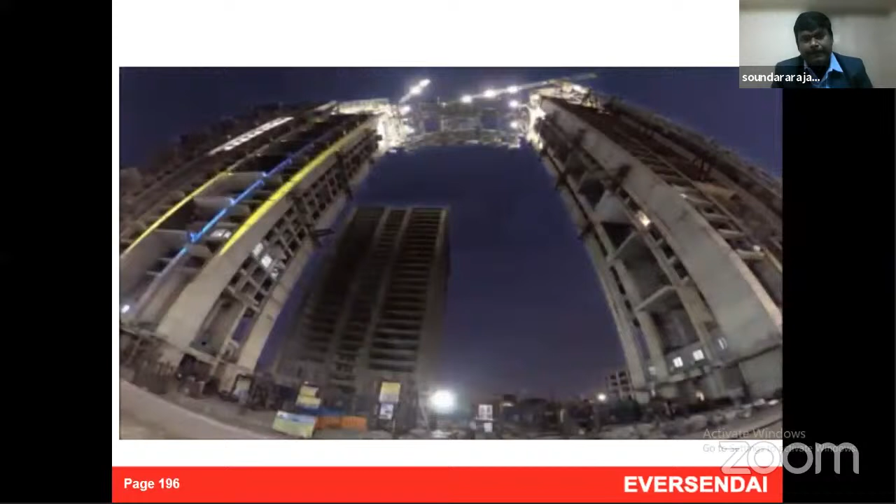So it took a day's time for the lift to happen. This is one of the recent photographs of the atmosphere structure.

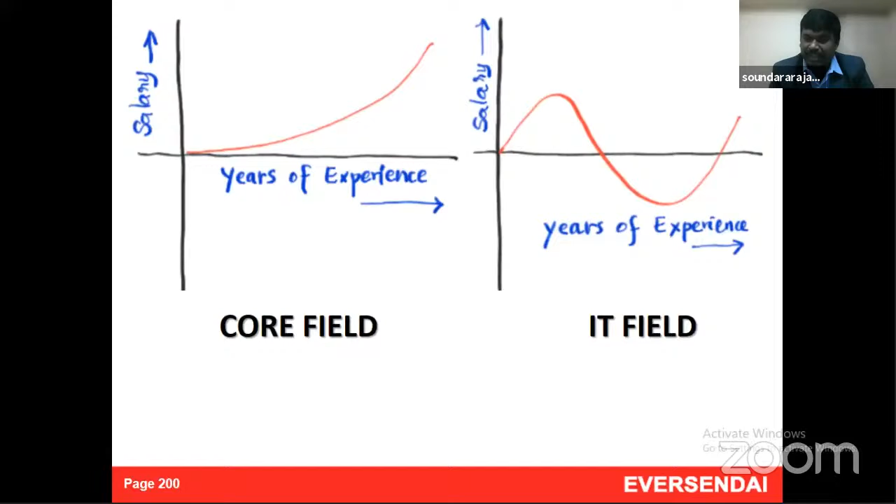So what you have to develop - challenges are highly open in the industry, and textbooks will not provide the exact solution. What you have to do is take the concept from the books, and you have to think laterally.

Whenever you have an opportunity to get industrial exposure, you have to take it, and take proper training. Whenever you have a professor, or whenever you are about to see a practicing architect, you have to gather as much knowledge as you can, since many things will not be available on the internet, I'm sure. You have to discuss with them, practice, and get it.

And most important, in any career, any field, money alone will not give any satisfaction. Apart from money, there are a lot of things.

Once you deal with it with pride, you can see the structure. That is more than enough than crores and crores of money. Whatever you earn, you are going to eat only three times a day, and you are going to wear maybe two or three dresses per day.

So don't look upon money. Think of your goals. Always be crazy about your profession. Always think that you have to make it a marvel. Just give importance to your ethics. No need to worry too much, God will take care.

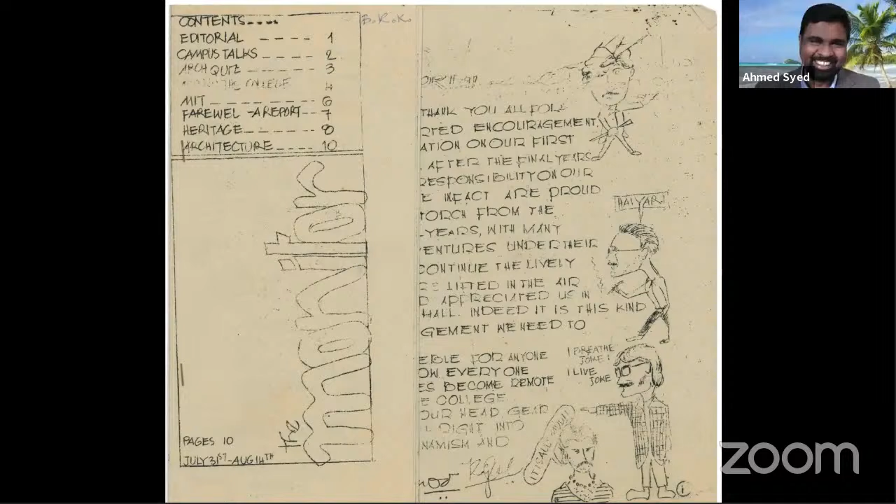The first magazine, right Ramakrishna, these are all the classmates. Cartoons are there. Thanks, remember that. You can see BT down there, no? BT figure, cartoon, yeah.

This is mainly to inspire my students, because they are working on the first release of an in-house magazine. I wanted to show how our senior BT did those things in the days when technology wasn't available. Technology is a tool, and I would really urge students to look at what's available at hand as the most important thing. Don't make it an excuse that we don't have this or that. You should start off and jump in with what's at hand right now, and proceed on that basis. When you say 'I don't have that technology to do something,' that means you're putting barriers for yourself.

So when we started this magazine, it was more of an enthusiasm and collective effort, how students could come up collaboratively and distribute their thoughts and communication. For us, it didn't really matter, we just went ahead and wrote on paper and found resources that could be circulated. Now, of course, you have much easier technology to distribute your communication digitally. So it's all about your enthusiasm that matters.